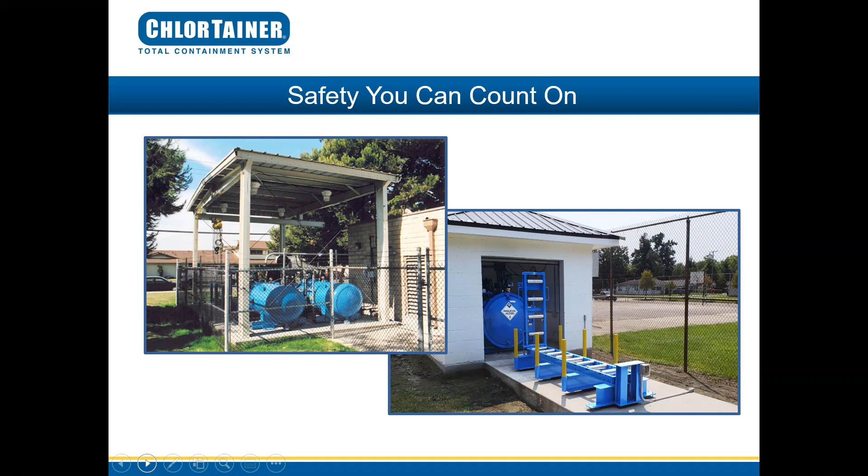This is a site in Benicia, California, where you see two ChlorTainers in operation, and the site is very clean. This is a very proud group of operators. These ChlorTainers are 15 years old, and with minimal maintenance, they can look like this and work just like they did the day they were installed 15 years ago.

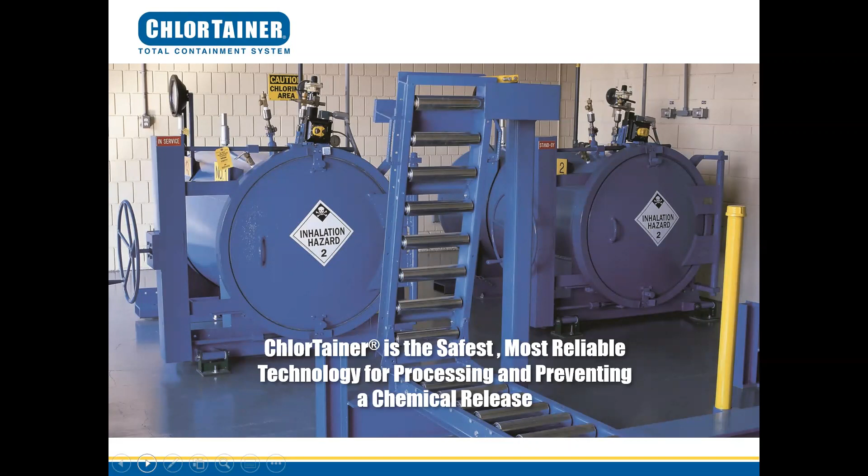The Chlorine Institute Emergency Repair Kit requires constant practice and training to help ensure the timely repair of a leaking cylinder. Had they been processing with ChlorTainer, an external release would not have occurred, and an operator would not have had to suit up and risk entering into a hazmat situation.

All the gas is contained within ChlorTainer and simply put into process at a normal rate. There's no need to respond or report an incident when using ChlorTainer.

Chlorine gas has been the disinfectant of choice for decades. The risk associated with an accidental release is why cities nationwide have chosen ChlorTainer to protect their operators and the surrounding community.

ChlorTainer eliminates the need for a scrubber, an emergency response team, and a repair kit. There is peace of mind in knowing that you'll never have to alert the community of a mandatory evacuation due to a chemical release.

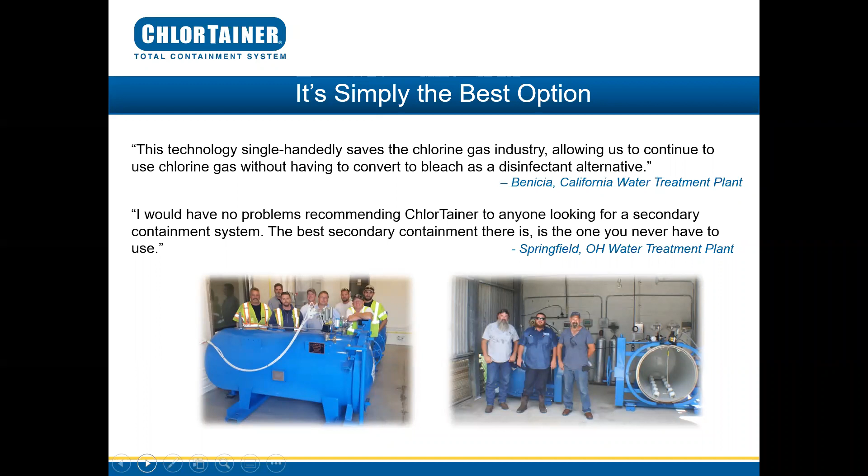The reason being, when a cylinder fails within ChlorTainer, all of that gas is prevented from releasing and is trapped within ChlorTainer, which is then able to process that gas at a normal rate. So they went home. The following week, those operators sent an email to the CEO of the Baton Rouge Water Company saying, should you ever stop processing with ChlorTainer, we'll no longer work here. They felt that comfortable and that much more safe once ChlorTainer was in their chain of process.

ChlorTainer provides secondary containment built to ASME standards to prevent and process the maximum release of a failed cylinder. The chlorine cylinder is inserted and processed within ChlorTainer.

Each ChlorTainer comes with a loader, scale, and all the components required to operate. In this photo, you can see a ton ChlorTainer here on your right, this is our loader, and here's a 150-pound ChlorTainer.

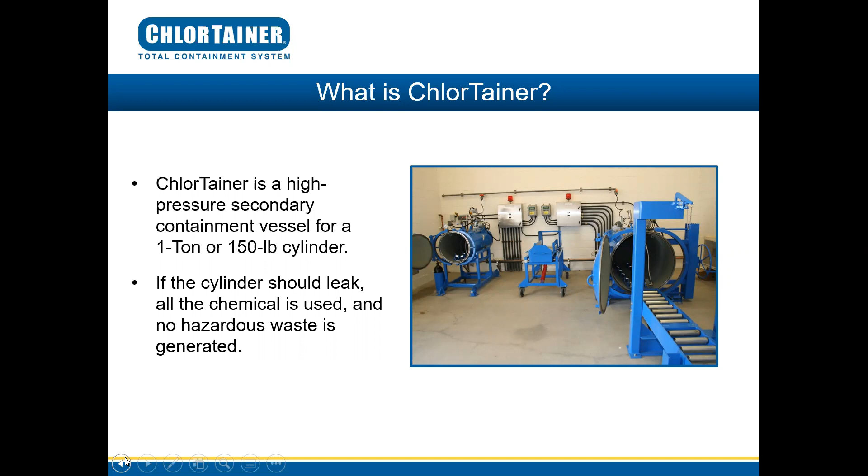They're processing the ton cylinder. Once that cylinder is empty, the vacuum regulator will automatically switch over to the 150-pound ChlorTainer. This provides constant chlorination while you're able to replace the empty cylinder and keeps the site below the threshold for RMP requirements since they only have 2,150 pounds on site.

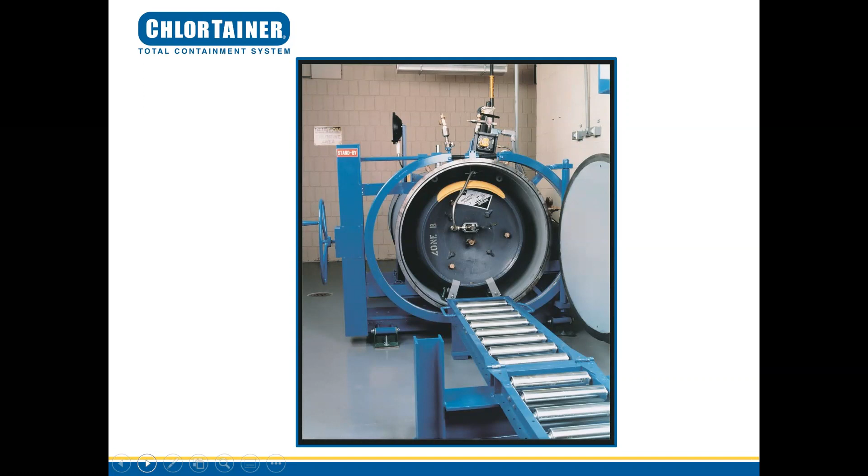In this photo, an operator has already loaded a ton cylinder of chlorine into ChlorTainer, and we're getting ready to process from within the vessel. The rollers you see here are at a slight slope for easy loading of the cylinder, and the operator just needs to make a simple yoke connection, close the door, and we're ready to process.

We've put together a video series on the operation of our ton ChlorTainer. Each segment is broken down by function, and we encourage you to visit our website to view each of them. They're very helpful. Our video series on the 150-pound ChlorTainer is currently in production, and we're about to release that to our website as well.

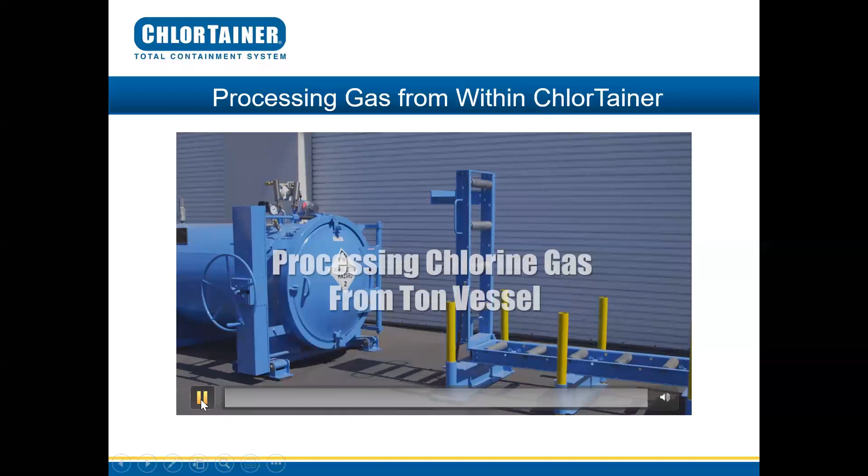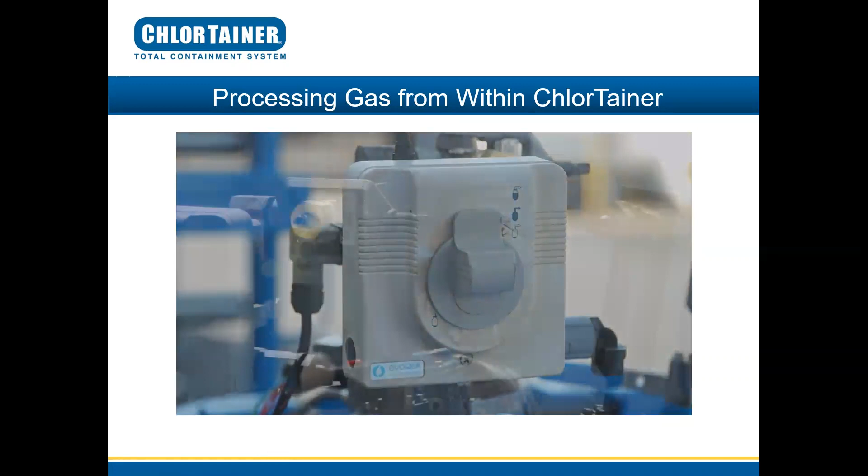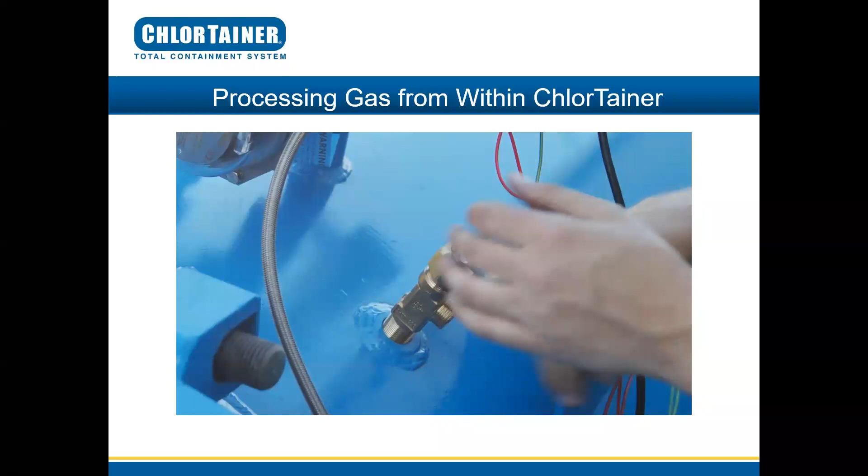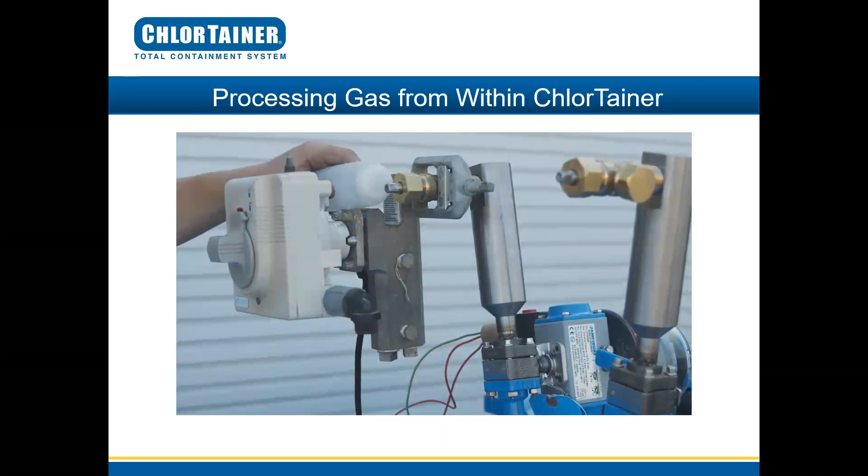After the vessel door has been completely closed, make sure the vacuum regulator is set to accept the flow of chlorine from the exterior chlorine supply valve. Make sure the vacuum pressure gauge valve is in the open position, while the pressure check valve is in the closed position with the cap on. Next, open the exterior chlorine supply valve one full turn. Ammonia wick the connection at the exterior chlorine supply valve and vacuum regulator to ensure there are no leaks. ChlorTainer is now operational or on standby. The scale system should now be inspected to ensure proper weight and settings.

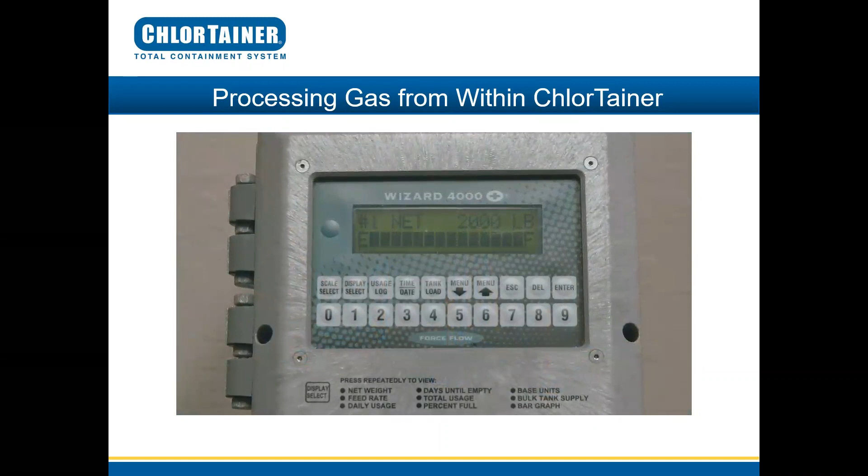This is a close-up shot of the components of ChlorTainer. Next, we're going to talk about how each of these interacts with SCADA.

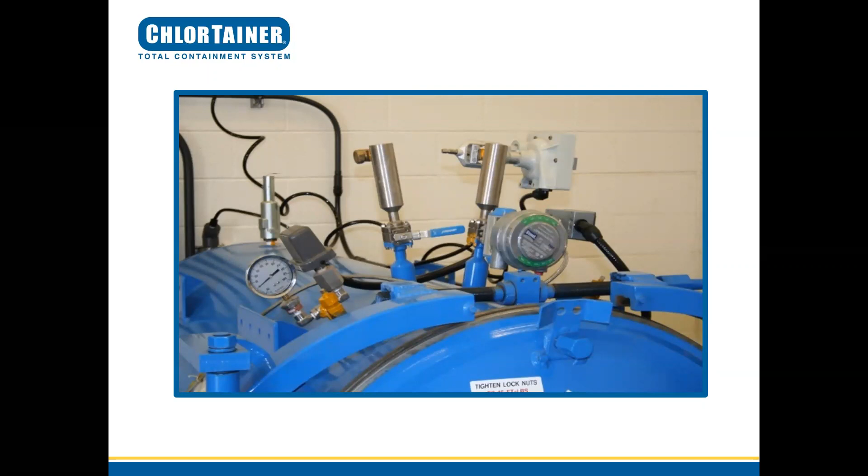In the event of a failed cylinder within ChlorTainer, the pressure gauge here will indicate pressure, and the pressure switch, which is interconnected, will send a signal to alert the operator via SCADA or an alarm indicator.

With many plant operators working remotely due to COVID, SCADA has become more desirable and necessary than ever. ChlorTainer vessels can be connected to several systems such as SCADA, allowing operators to work remotely while getting real-time recordings via their laptop or smartphone.

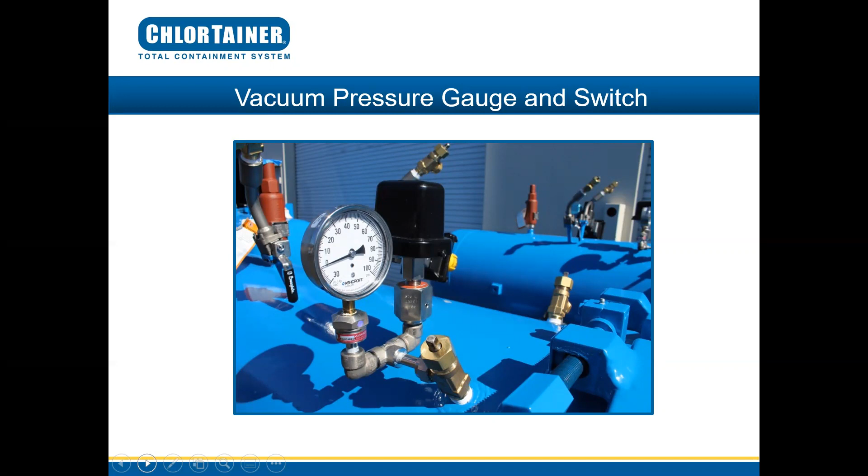Our FailSafe valve is normally in the closed position, whereby the indicator appears red. When energized using electricity and nitrogen, the indicator will cycle open and turn green as shown. The chlorine sensor is tied into our FailSafe valve. Should a leak be detected outside of ChlorTainer, the sensor will send a signal to our FailSafe and close the FailSafe valve.

Since the line is under vacuum, there will be less than 9/1000ths of a pound release. If the plant were to lose power, the FailSafe valve would cycle closed and reset open once power is returned. Both the chlorine sensor and FailSafe valve indicator can be remotely monitored via SCADA.

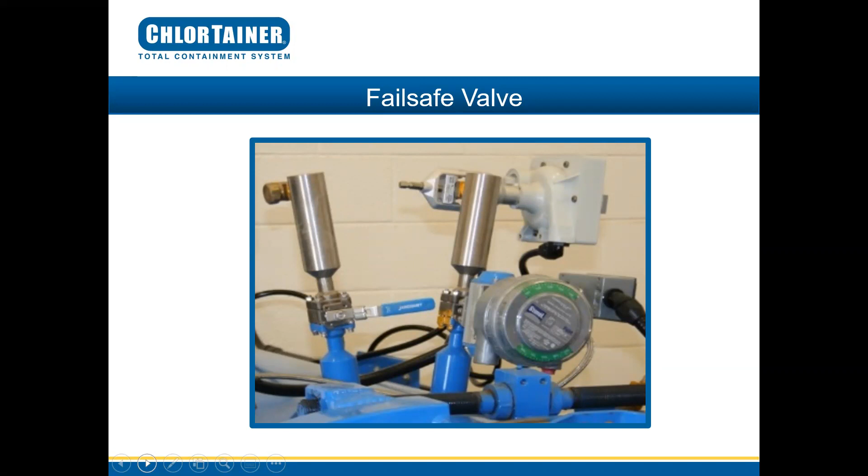Each ChlorTainer comes equipped with the Force Flow G2 scale. Unlike other scales, it comes pre-calibrated and installation is very simple. The 4 to 20 milliamp outputs allow real-time chemical status to be viewed from your PLC or computer, and other options include low-level alarm relays and chart recorders.

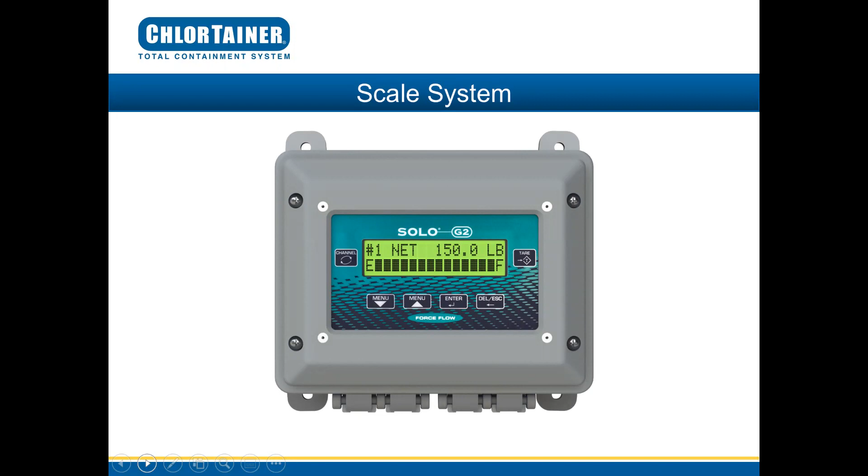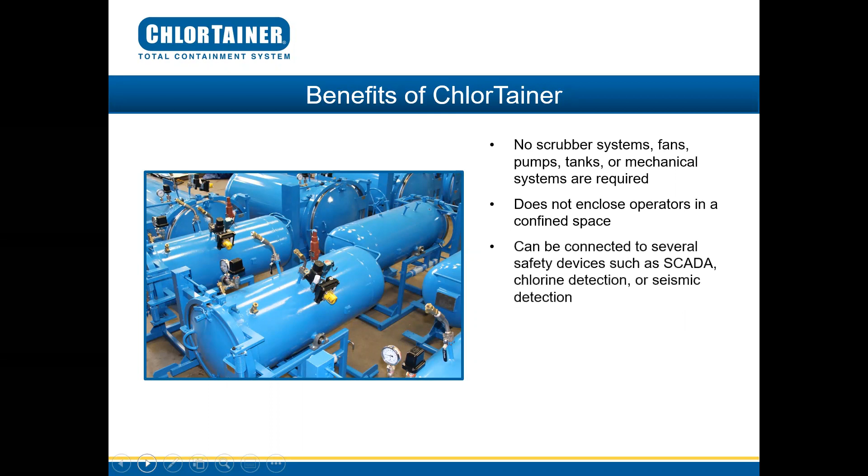ChlorTainer is a complete system that provides fail-safe protection from any kind of accidental release. With ChlorTainer, you don't need a scrubber or any other mechanical systems. As we talked about earlier, your operators will not be trapped in a confined space with hazardous chemicals. Our technology can be connected to SCADA and other remote monitoring devices.

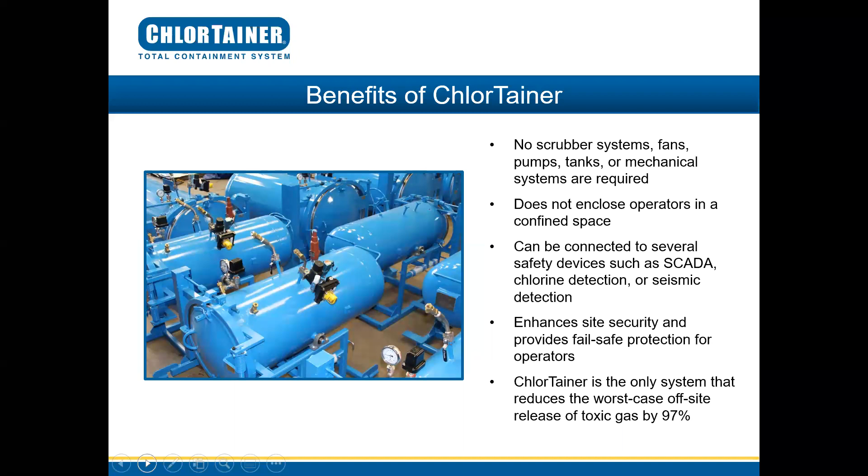The locking door ensures that only your operators will have access to your cylinders inside of ChlorTainer. If a full ton of chlorine were to release, it could potentially affect a 3-mile radius. ChlorTainer will reduce that affected area by 97%.

ChlorTainer is built to ASME code and can withstand the maximum pressure produced by a failed cylinder. There isn't a safer option available when you're dealing with toxic chemicals. The passive nature of ChlorTainer ensures that there isn't an opportunity for mechanical failure. For RMP purposes, the EPA will only accept passive technology.

Installation is very simple, so simple that most operators can install the ChlorTainer vessels themselves just with the aid of an electrician. ChlorTainer is made in the USA and has a life expectancy of at least 100 years with minimal maintenance.

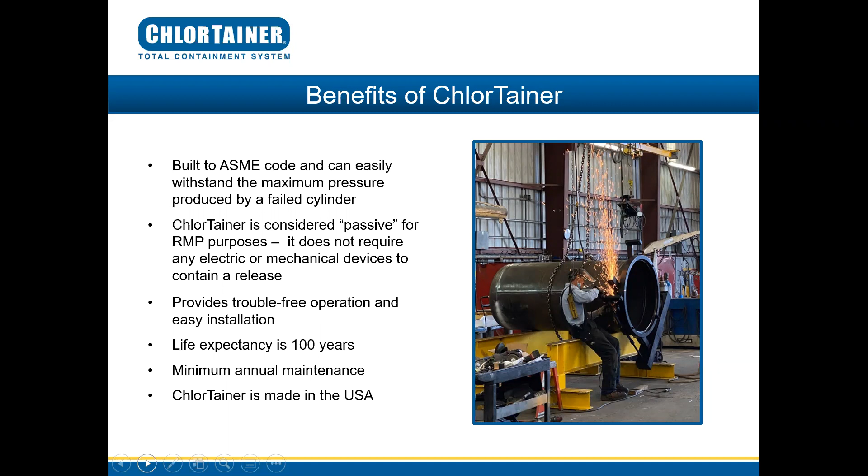Half of our ChlorTainer installations have been done by the operators with the aid of an electrician. It simply bolts to the ground using Hilti anchors.

ChlorTainer can be installed outside of the chlorination room, and the plumbing can run through the walls to save costs associated with having an engineer design and build a room expansion.

The loader and ChlorTainer are designed to be used with just overhead protection to prevent damage from the elements.

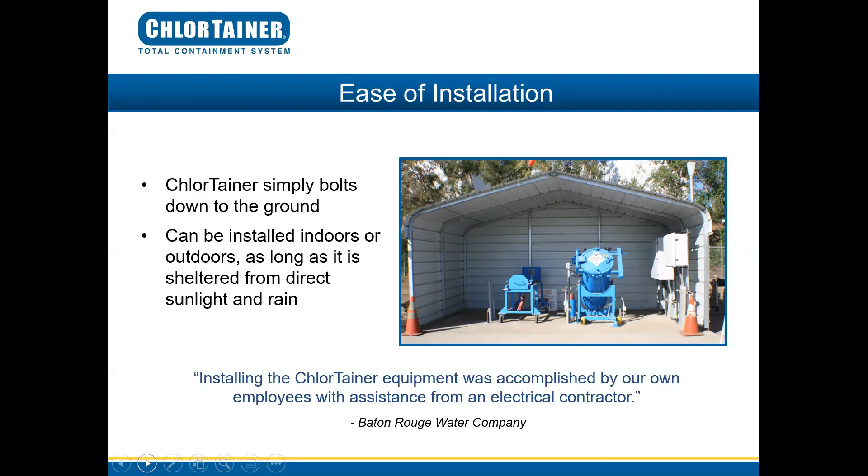ChlorTainer vessels are built to last, and your investment is made at the time of purchase. All you need to do is replace the O-ring on the door once a year. Every 5 years, you need to repack the FailSafe ball valve and replace the chlorine transfer hose. It takes about a half an hour of your time, and it costs about $200 annually. Minimal time for maintenance is one of the most appealing aspects, that's the feedback we're getting from operators.

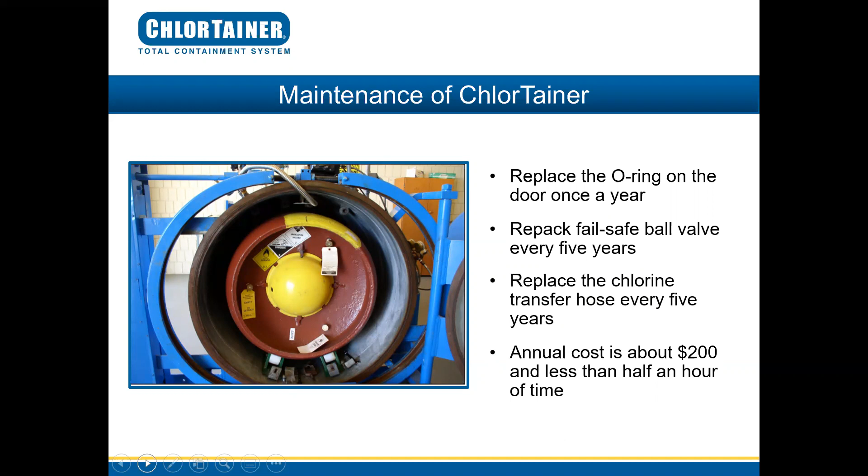This site is next to an elementary schoolyard located in Los Angeles, California. As you can see, it is in a very high-risk area. The vast majority of EPA regulations and guidelines originate in California. With ChlorTainer, this site not only met, it exceeded all fire codes and standards.

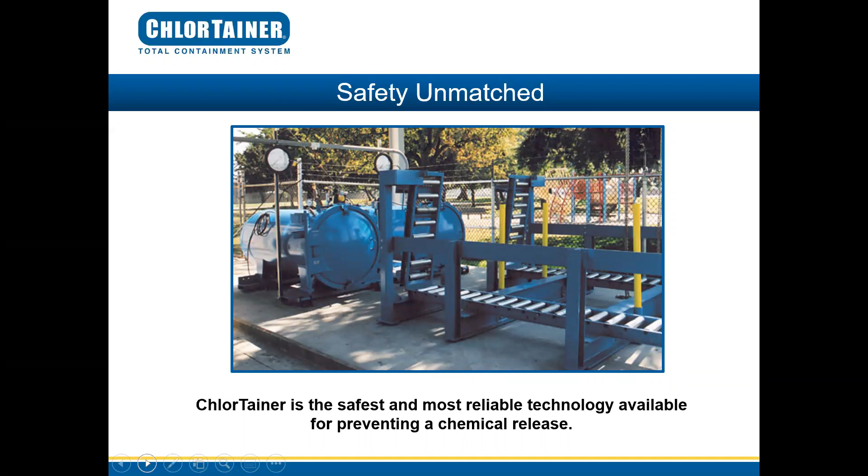The image on your left is an example of a room where space was tight, so they just ran plumbing through the wall. The fixed loader was installed outside the doors on a concrete pad. We also offer movable loaders, and we can customize the loader to fit whatever you need.

The image on the right is a photo of our new electric loader. By pushing and holding a button, you can load and unload a ton cylinder in just minutes. The city of Houston has already installed one, and we're getting some great feedback from that.

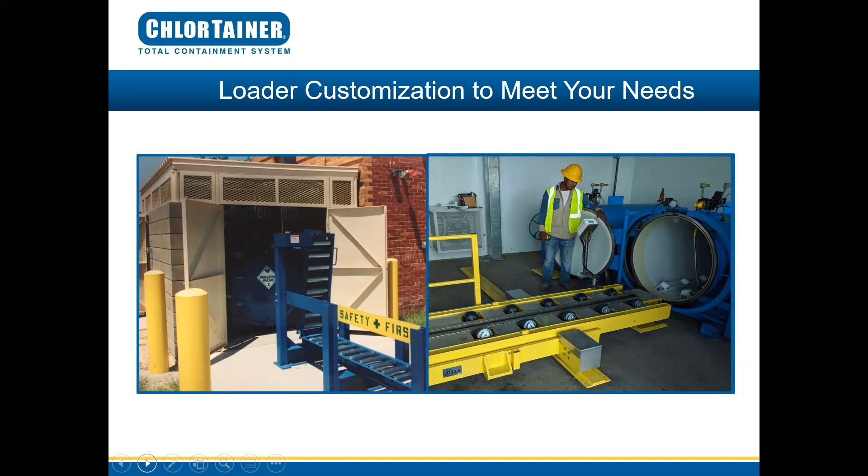Here's an example of an indoor site. You have 3 ChlorTainers in process. You can see back here with fixed loaders in the foreground.

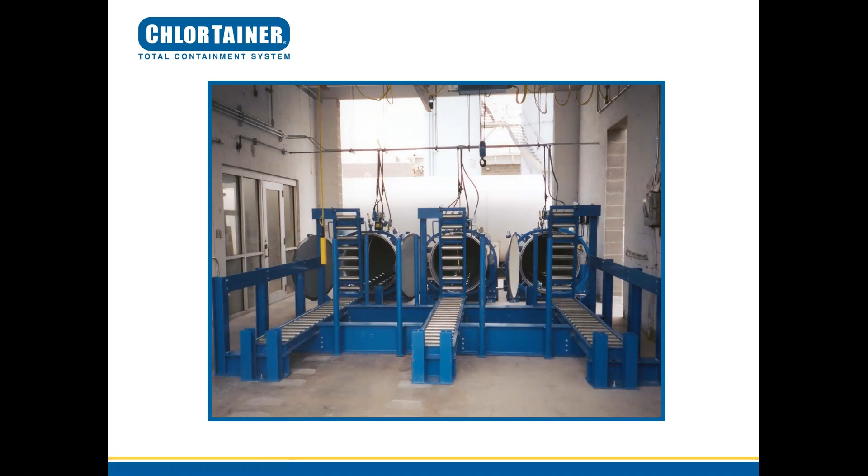The I-beams and safety poles are used to provide ton cylinder storage. On the back side of the loader, here, here, and here, we can install a winch to provide easy extraction of the empty cylinders.

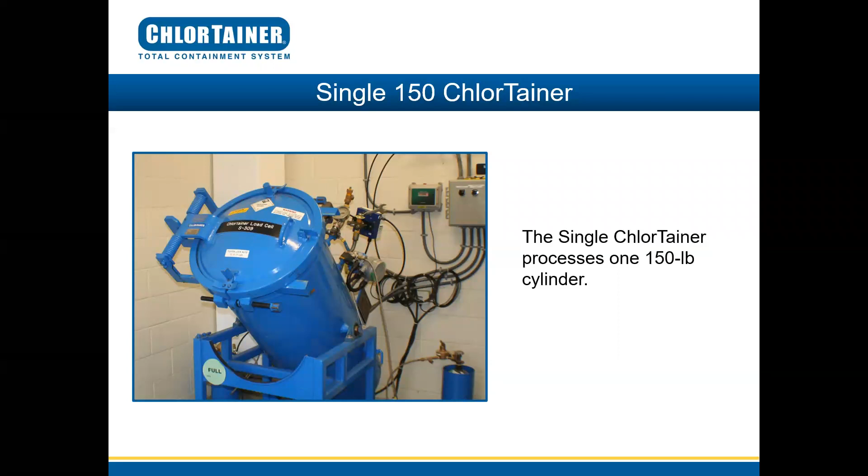ChlorTainer comes in 3 150-pound models. The single 150 is commonly used in conjunction with a ton cylinder, which keeps sites under the 2,500-pound threshold while still providing constant chlorination. The twin 150 provides a capacity to feed 300 pounds of chlorine at one time.

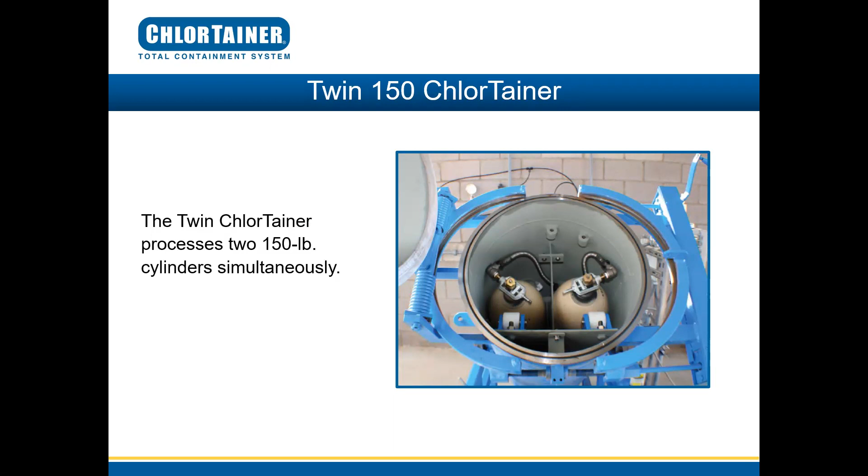The dual ChlorTainer is our most popular of the 150-pound vessels. Once one cylinder is empty, it will automatically switch to the second full cylinder.

The horizontal position that we see is strictly for loading and unloading. The ChlorTainer tilts back to a 45-degree angle for processing. All of our 150-pound ChlorTainers come with a tilt switch for added safety to ensure an operator can never lower the vessel while in process, which could damage the vacuum regulator should liquid get inside.